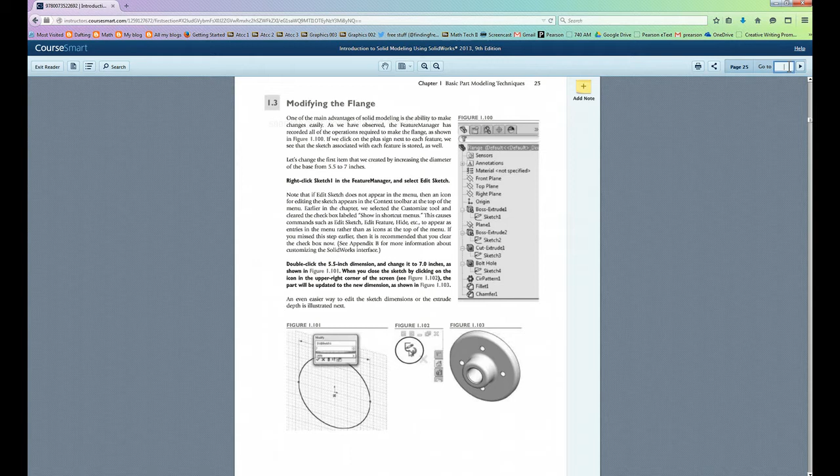Okay, on this tutorial we are going to modify the flange, and we're going to cover the material in the textbook from page 25 to page 29.

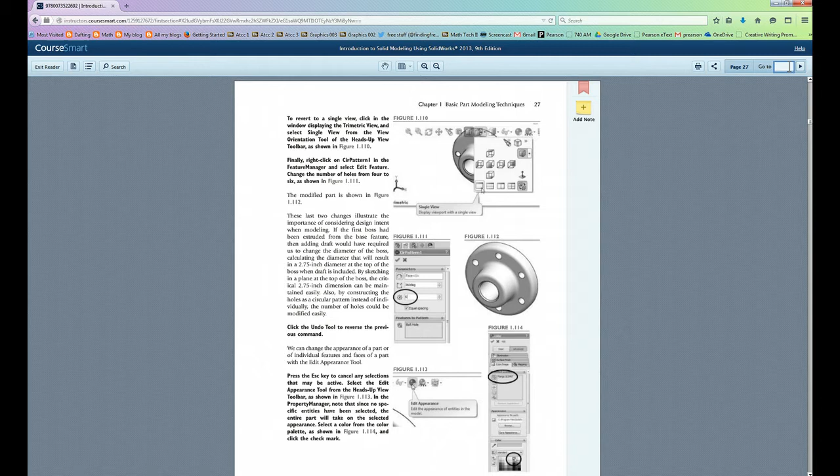Here's page 25, this is page 26, you can review that for a second. Page 27, you can review that for a second. Then we'll look at page 28, and the last page we will look at will be page 29. Take a look at those, and we'll start actually modifying in just a second.

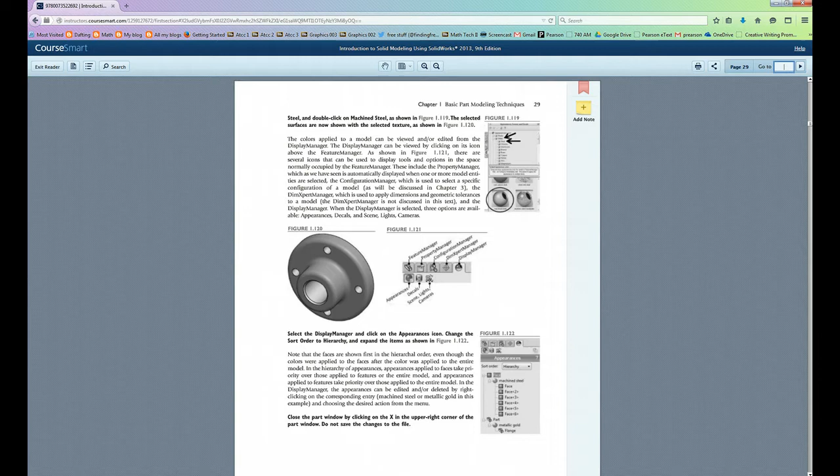Now what we're going to do is actually edit this sketch. The textbook tells you if you right click this, the edit sketch option will come up, but it doesn't. So what we need to do is make sure first that we are in the sketch tab, then we'll click a surface, and you'll notice this pops up when we left click on it with the mouse. This edit sketch option comes up, and that's where we're going to gain access to editing the sketch.

Let's say we want to edit this dimension here. We'll highlight it, double click it, and we can change it over here. Let's say we're going to change it to 7.5. Then we'll click OK, and it changes it to 7.5.

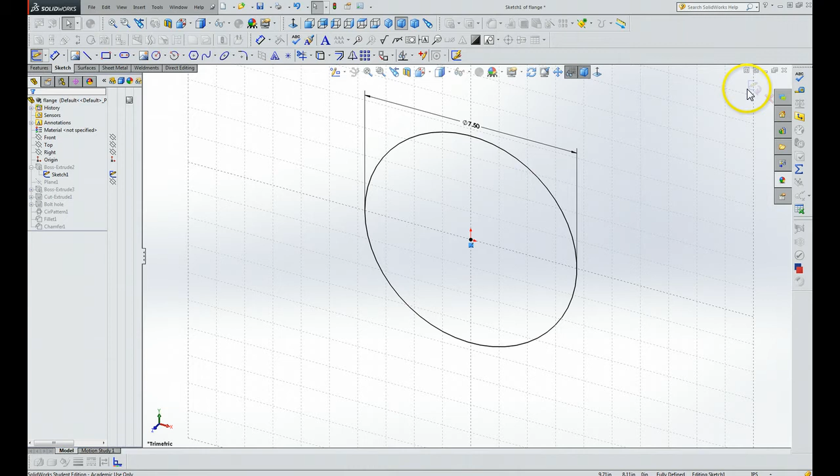Now if we want to save that dimension, we'll click on this icon right here, and it saves that dimension. This part here now has the new diameter that we just modified.

Now then, if we go over here and double click on this particular part—it may be different on yours, but the Boss Extrude 2—if we double click on that, it also shows us the dimension here and the dimension here.

Let's say we want to change that back to 5.5. So we click on that, we delete that, we put 5.5 there, we click on the check mark, and then we should be finished.

After we do that, this feature right here, we'll double click it quickly, and it should show the dimensions. We double click back on that, and we're going to change that back to 5.5.

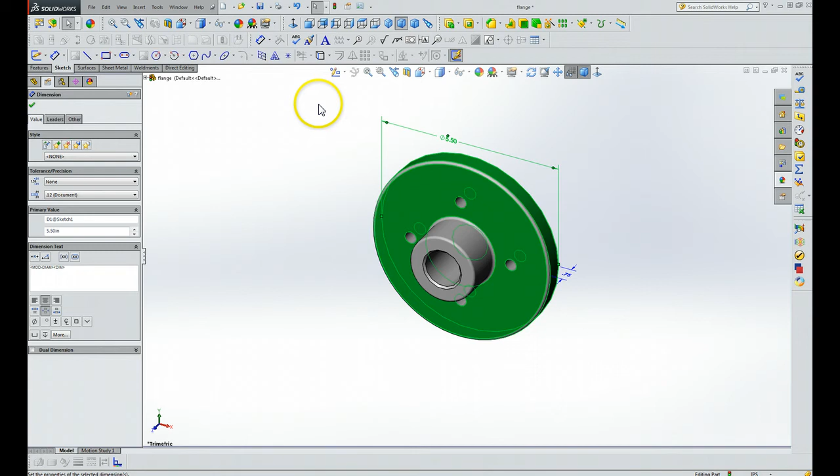We click the OK button, and then when we're finished with that, we can click the rebuild tool up here, the little stoplight, and that puts it back just like it was before.

What we're going to do now is set the draft, and that just means a taper of a particular hole, so that it wedges, so you can wedge it on a shaft.

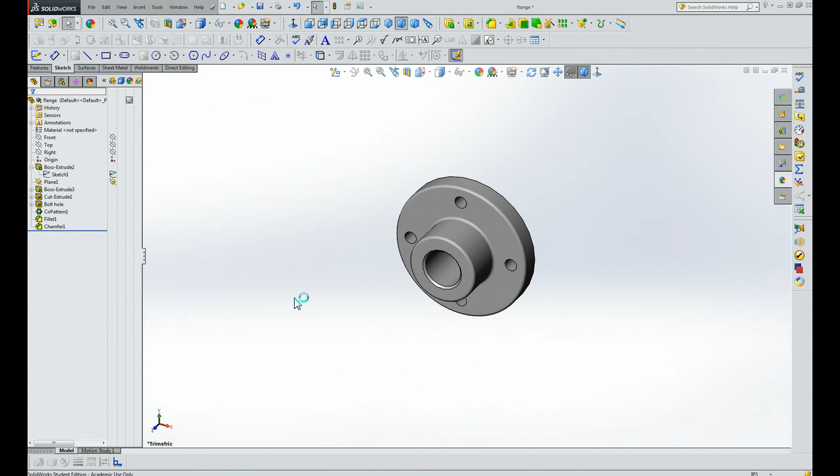So what we're going to do here is we're going to select this, and you'll see how it highlights that particular feature. The next thing we're going to do is right click that, and then we put edit feature, and let's see, we're going to have to reveal some of the...

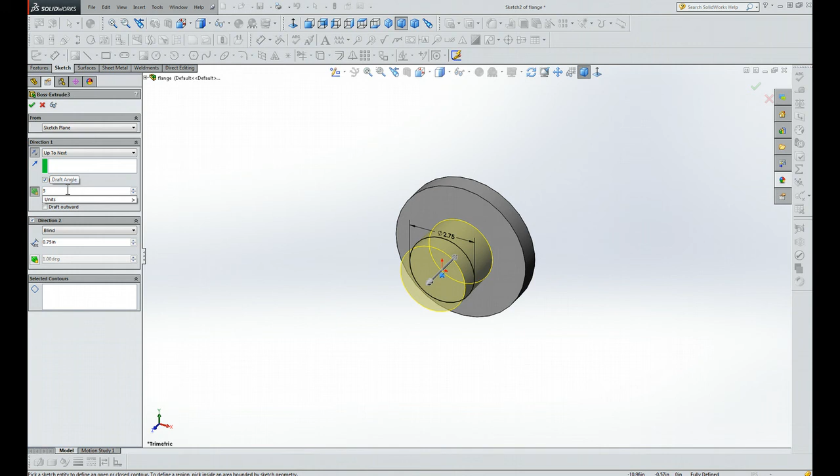Okay, I'll pause here and figure this out. Hang on. Okay, make sure this is up to next, make sure we click merge result. Then you highlight this little icon right here, and that's where you put your 3 degrees. You enter that, click your green button, and this gives a draft right here, or a 3 degree taper.